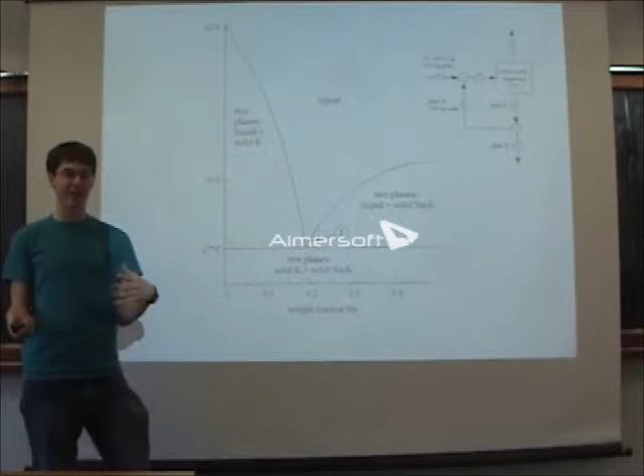All right, so here's the diagram we have to work with, something we've seen before. We started kind of on this side. Remember the eutectic point we talked about? It's similar to an azeotrope in that it's just difficult to get around. So here we're going to explore ways to get around it.

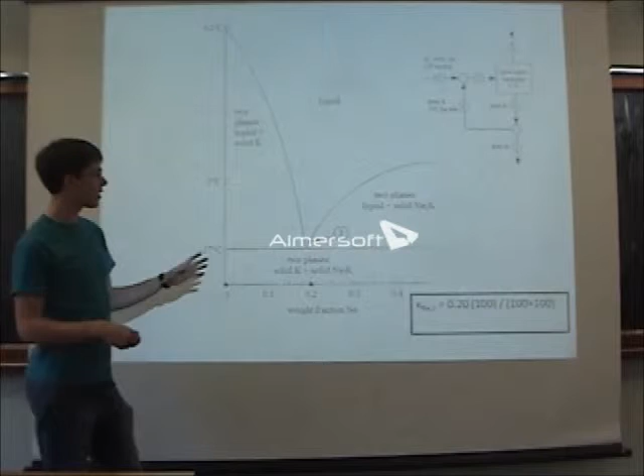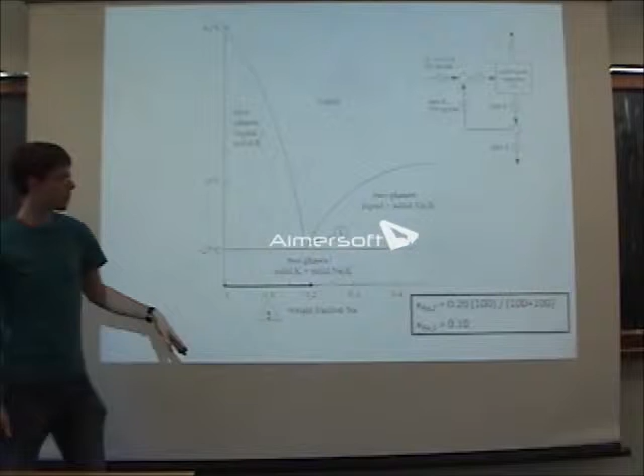So first we're told that we do have a stream coming to this point, and that we are going to try to add some pure potassium to bring it to this side so that we can then separate out more, basically just shifting this over. So let's look at that equation. Say we mix equal parts. We get the fulcrum in the middle. We're told it's at 0 degrees Celsius, so we go up there. And then right away we should know we want to do the lever rule here.

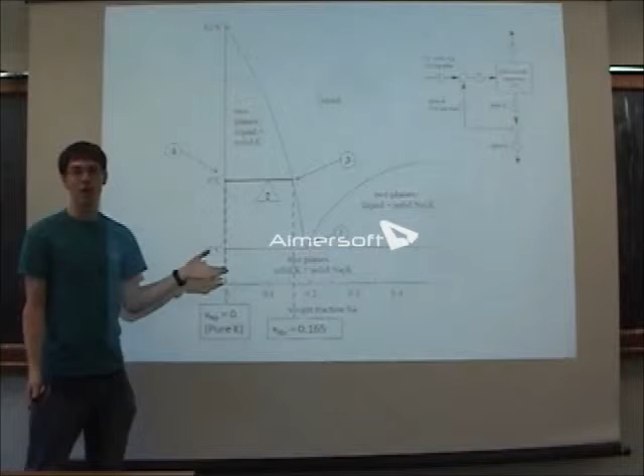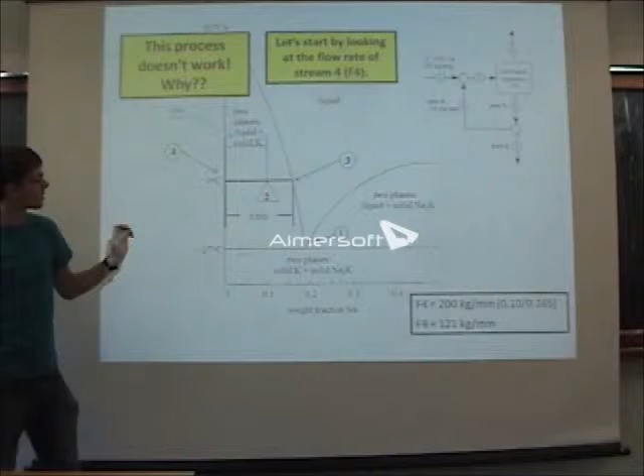So we're also told it doesn't work. So let's see exactly why. So look at the flow rate. We can figure out from 4 and 3. Here's the total distance. Here's the distance for 4. You know, that whole lever rule equation, something like that. So we can get these. How's this look so far?

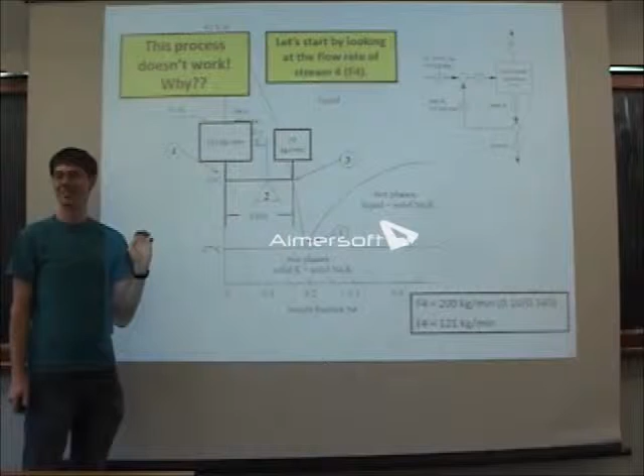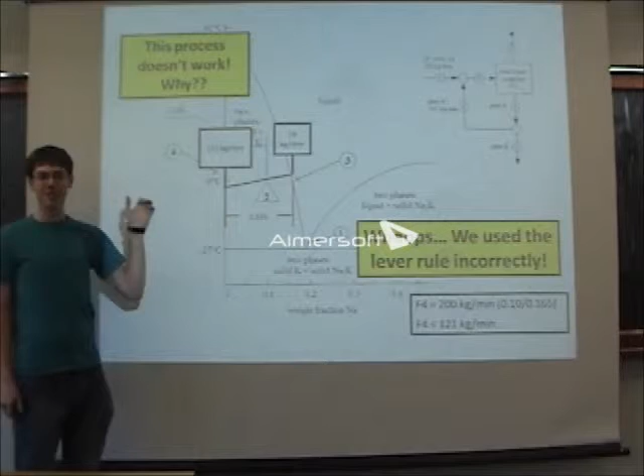What? Oh, oops. Yeah, see, this should look obvious. If you had a seesaw right here and a giant mass, that would clearly be weighed down. I don't know if that ever happened to you on the first grade playground. But yeah, make sure this is an old tool. You don't want to make silly mistakes like this. So just a quick reminder. Let's flip that out. We know we're actually supposed to use this side.

Doesn't need to see me. Maybe we'll go over here.

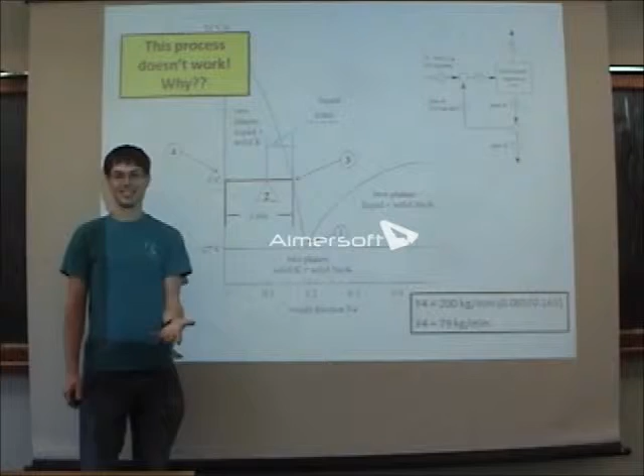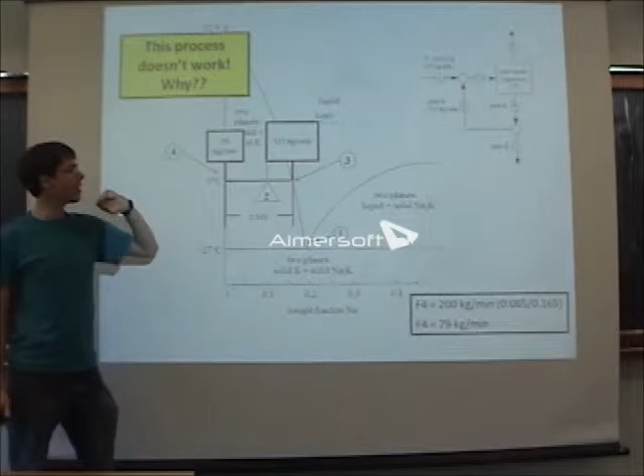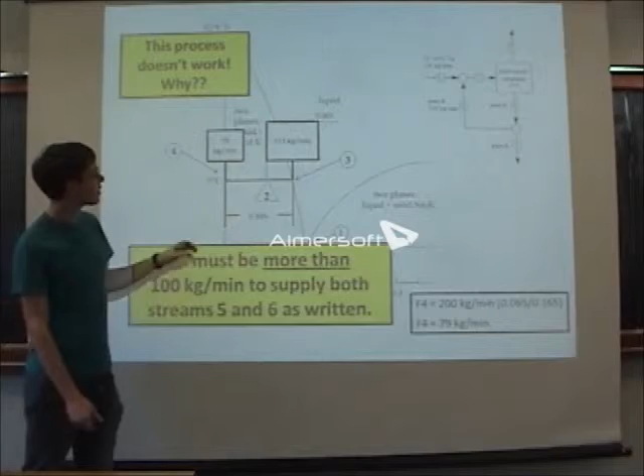So here's the actual correct one, and this looks a little more balanced. As we see right here, we have 79 kilograms per minute coming in. Now, stream 4 over there must be more than the 100 kilograms that we supplied. So if we only have 79 coming out from here, but we said there was 100 going in here, that means that we're actually pumping in potassium over here. So not at all what we wanted. So this does not work.

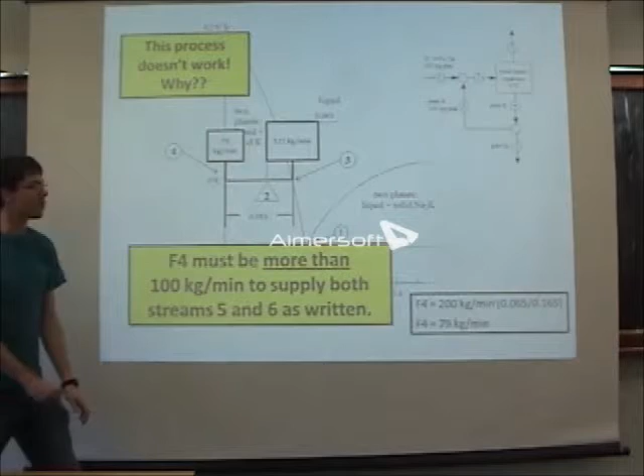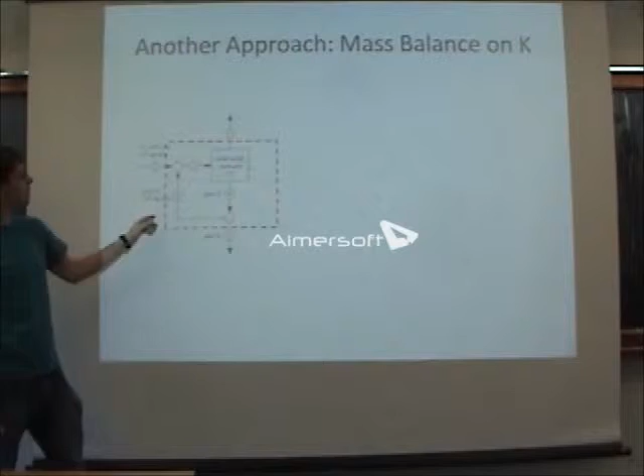And then as some of you found, there are multiple ways to go about this. You can also look at it like a mass balance. If you draw your system borders around all your input and output streams, you know exactly what's coming in. We have 80 kilograms per minute potassium. We know because we read off at 0 degrees that this is the composition of potassium coming out the top. And by doing the lever rule, we know how much is coming out. So that comes out to 101 kilograms, which is way more than what we have coming in here. So that's another way to tell.

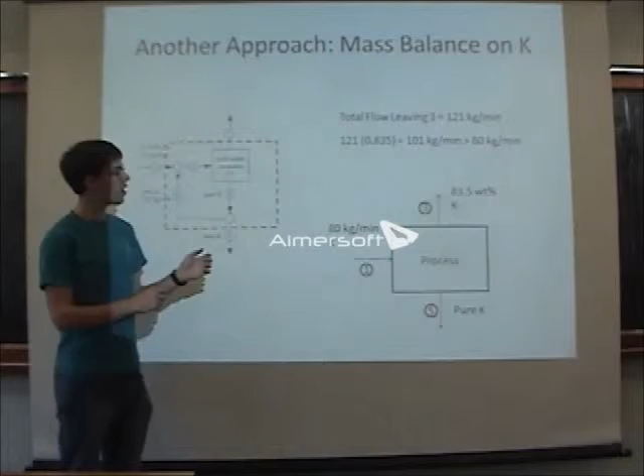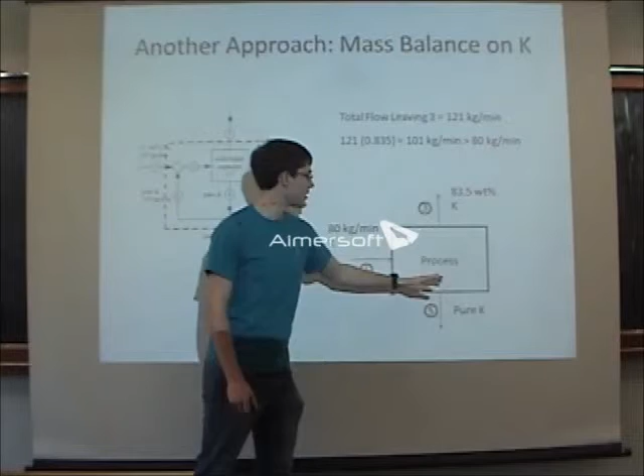And then you could also tell if you did a full mass balance, even not considering this, with just the sodium, that you'd have to have some kind of negative flow in here. But we can talk more about that later in part C.

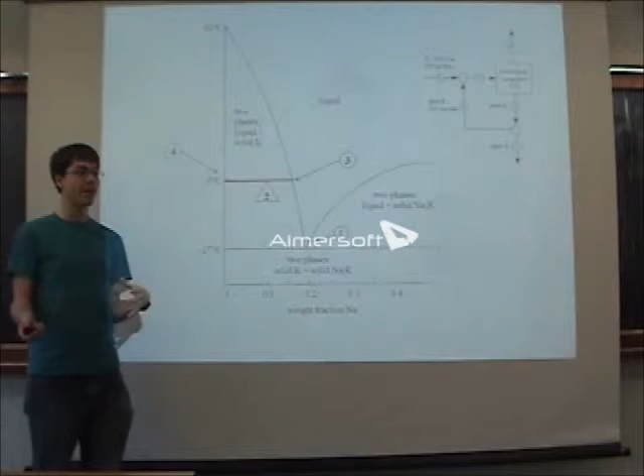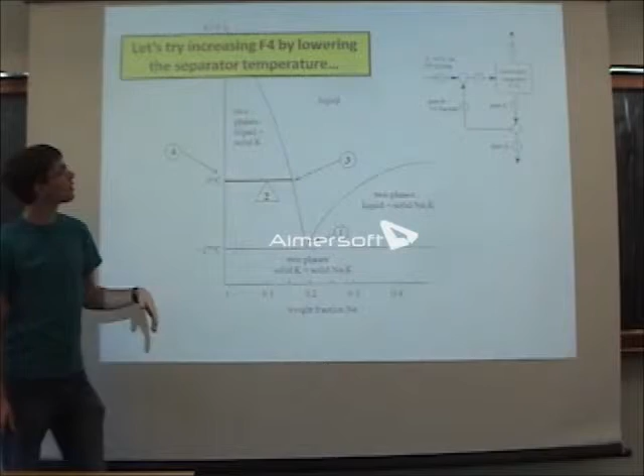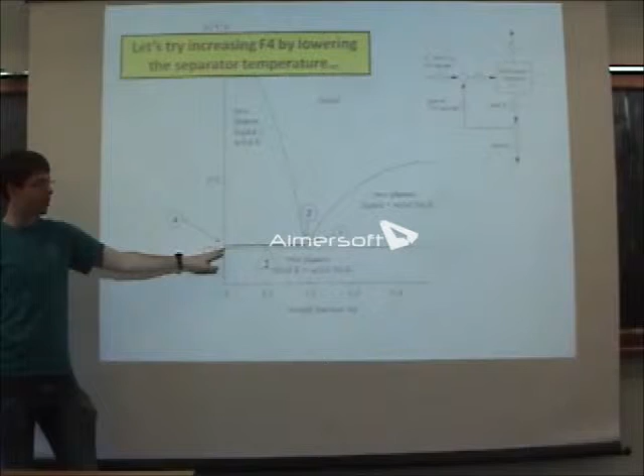So then it asks you, can you change anything in this process to make it work? So one idea, since up here you're kind of limited to this concentration of potassium or sodium, what if we lower this temperature down as low as we possibly can go? Then we can get more of it to come this way, because that was our main problem. We only had 79 kilograms instead of 100 kilograms over here. And that was because this side is closer, it's a smaller lever. So if we repeat this, now that we've lengthened this side, we can get more over here. Do the exact same thing, figure all this out.

There. We figure out, once again, there's only 82 kilograms coming out. Helps a little bit, not much at all. We're still not getting the 100 that we wanted.

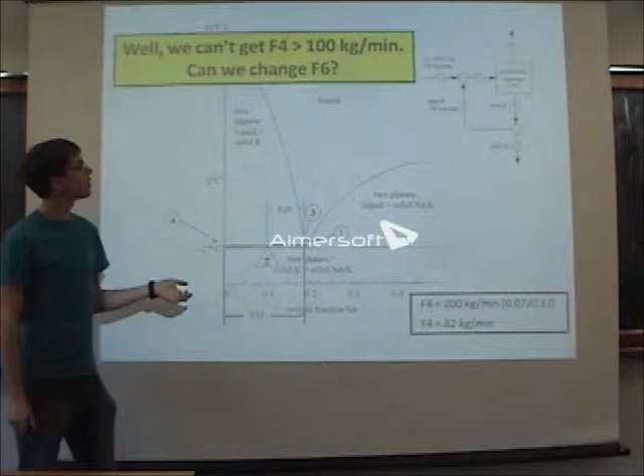So what did you all say? Did you say that there was some other way to make this better, to make this process work? Or no? Did anyone figure out a way to make it work? Because if you did, you should let us know. Nick? Magic. No? Okay. Well, I thought we came close.

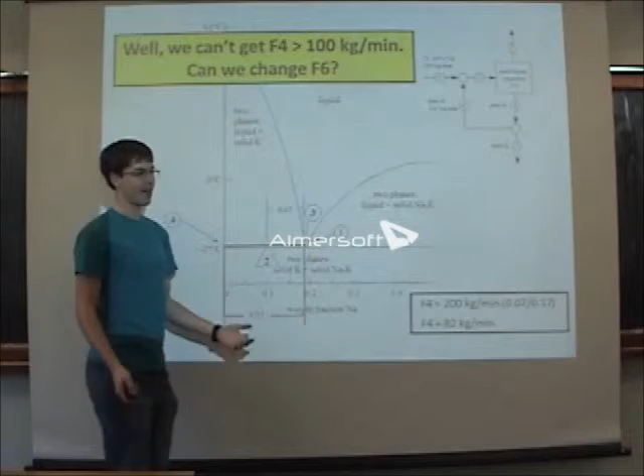We said if we raise the flow rate of F6 to 300. Raise this to 300? Yeah. Okay, so it was closer. So if you raise that to 300, then when you first mixed it, your fulcrum would shift over here. So yeah, let's talk about those sorts of options.

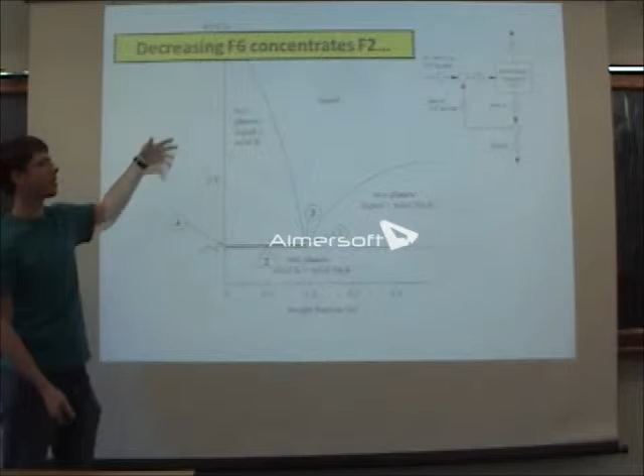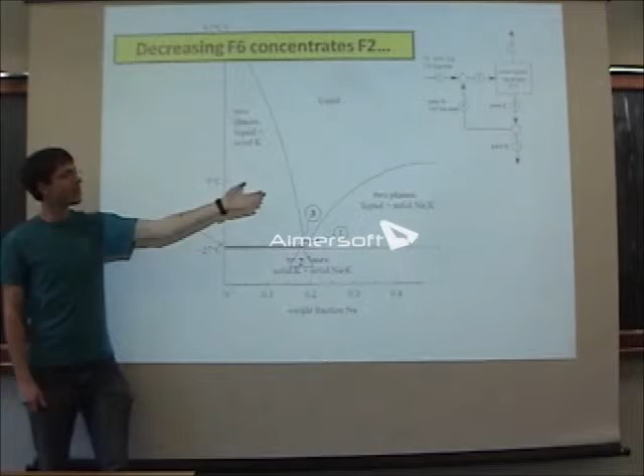If you decreased F6, so the flip side, you would move your fulcrum towards this side. So you would require less in here, so you'd have a smaller benchmark to meet over here. But now we see from this lever, we're barely going to get any pure K out. So that balance, if you go through the lever rule and everything, that's going to balance out again.

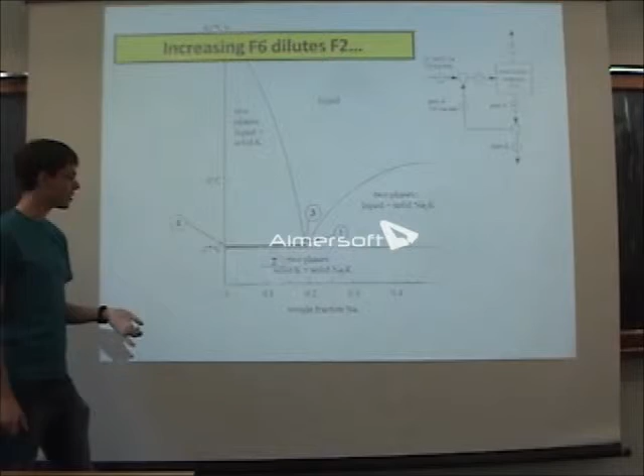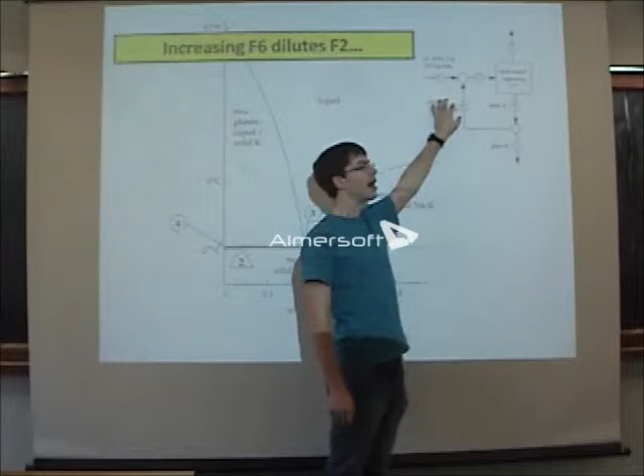And then what Nick suggested, you can move over here, increase that a lot, because now you're going to get a lot of pure K out of this balance here. But once again, even though you're increasing this a lot, this ends up still being larger if you do the same lever rule. You can't quite get over that boundary there.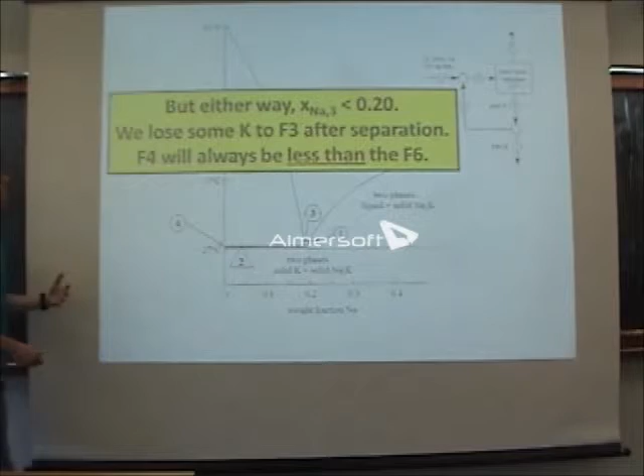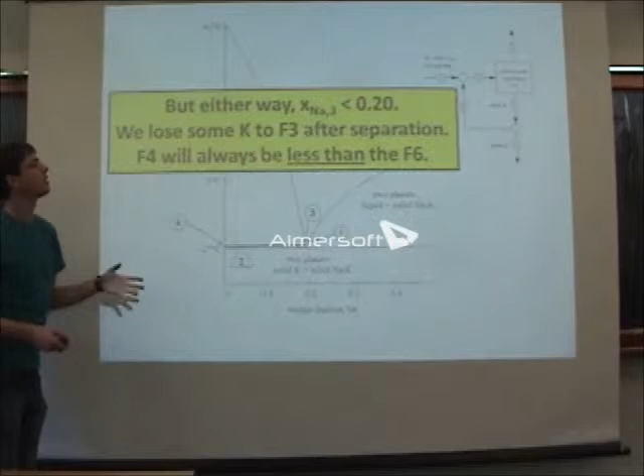So either way, because of this point still being less than this point that fed into everything, you can't actually meet your quota coming out of stream 4.

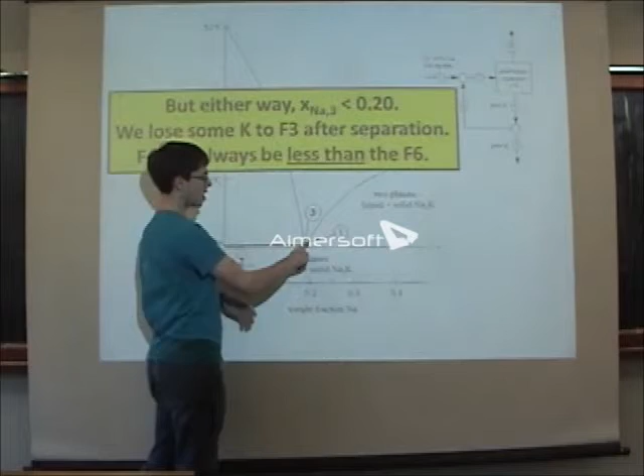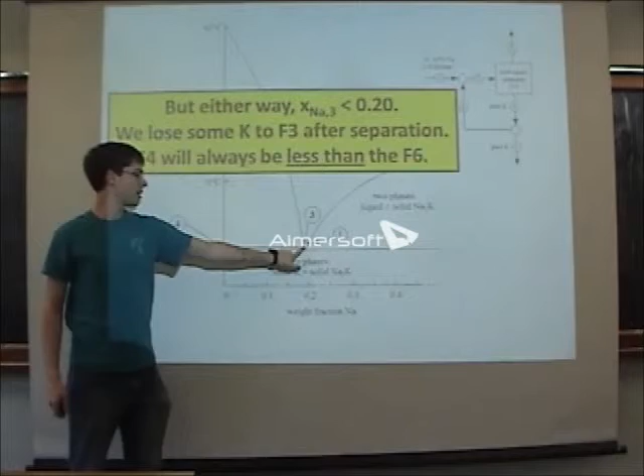And another explanation, I think it was Aaron who mentioned this. If you do a mass balance around the entire thing, you have a stream coming in here, and you have streams coming out here and a stream coming out here. So this is coming in, so this could be our fulcrum, and then this is what's coming out on either side.

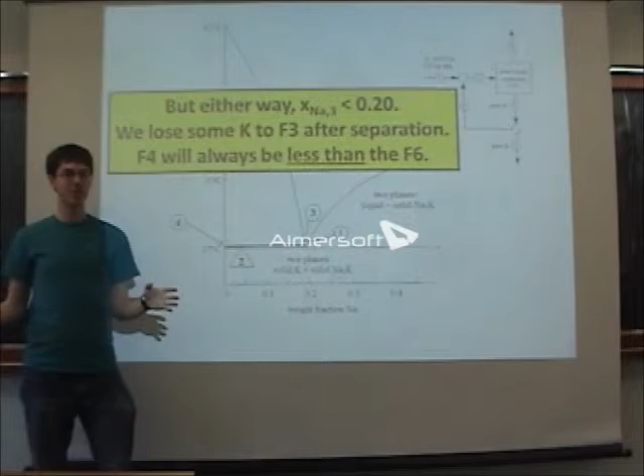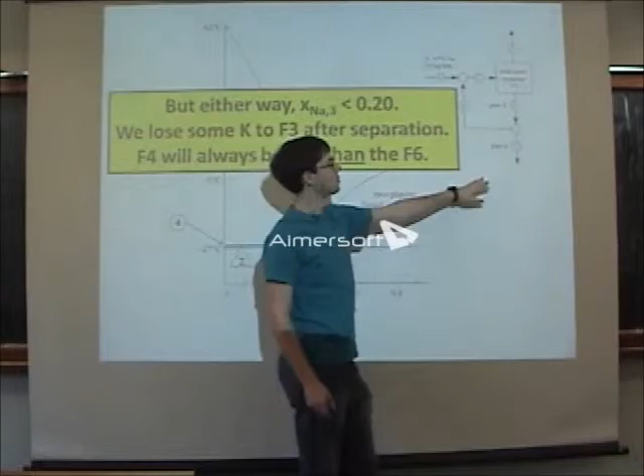Both of the ends of our levers are to one side of our fulcrum. In that case, there's absolutely no way to balance that unless one of them is negative, which is what we kept finding out. This always had to be going the other way because both children are on one side of the seesaw. It just doesn't work. So yeah, we can't find any way for this to work now.

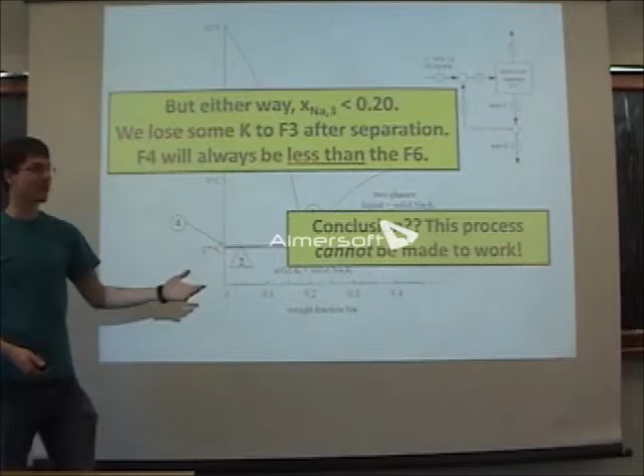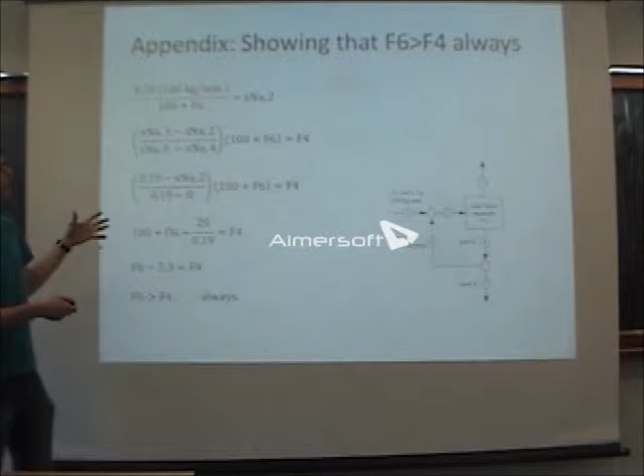So then you could also do this if you're less visually inclined. Don't have to go through all of this. You can go through this stuff if you'd like. But this shows mathematically, through the lever rules that we all did, how the flow rates of F6 and F4 compare.

And right here we just plug in from what we have in here. Keep going. Substitute for x Na. Go through it all and get that F4 is always smaller than F6. So we can never ever get enough potassium to come through here to meet what we want. So there's the mathematical approach and the graphical.

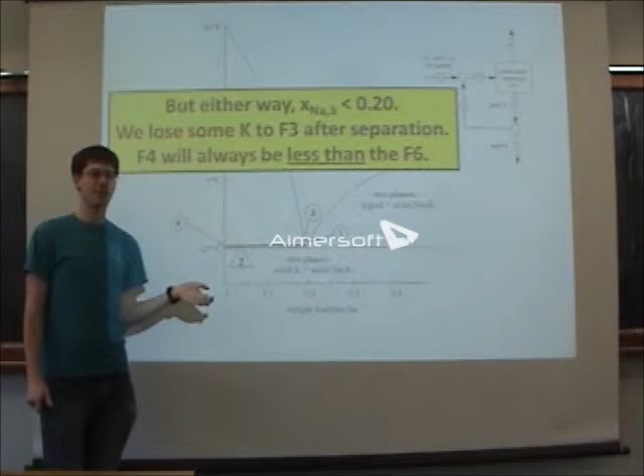Any questions on that? How the mass balance works out, phase diagram? No? Do we all get it? This is impossible? Cool. All right. Yeah.